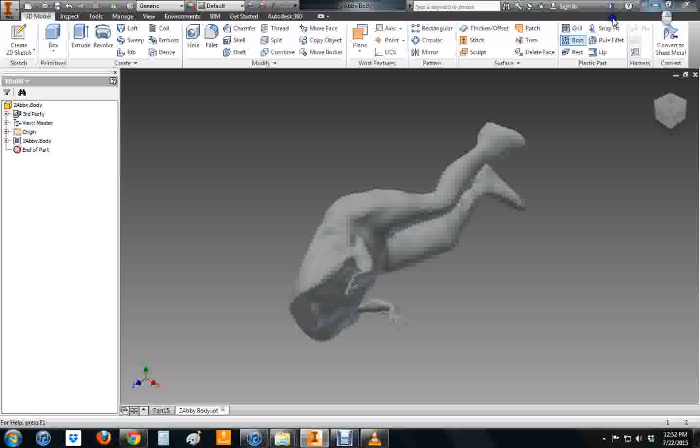So what you're going to do is go to Inventor, go to New, Standard.ipt, go to Classroom Programs, excuse me, not Classroom Programs, go back to your bobblehead. Here's my 2Abby.Body, we're going to bring it in up top here to open that up. Now this may take a moment or two, I'm going to hit pause because it'll be back in a second. Okay, that only took a few seconds, which is good, but what we did was we brought it into Inventor, and now the next thing we have to do is create it.

There's an app called Convert to Base Feature. This is an add-in that you can get off the internet if you go to Autodesk's website, if you don't have it on your computer here at school, which you should. Go to Convert to Base Feature. Now there are two options here. The first one is solid surface, and the other one is composite. It's hard to tell which one is set up, but you want solid surface, so consciously make an effort to click on that. We'll click Delete Original since we don't want that, and we'll say OK.

Now I know this should take a while, so we're going to pause and come back. This will take 5 minutes or so. Okay, so we're back. That took 2 or 3 minutes. It can take a very long time, especially on some of the computers in the room that don't have as good resources as my desktop here. So you sometimes have to be patient. It will say not responding, but it is responding. It's doing something, so eventually it comes back.

Once you've got it as a base feature, it's a pretty resource-intensive file. So just be conscious of the fact that if you do a lot of zooming and moving things around, it really goes a little kablooey. So I would just make an effort to do as little to it as possible. What I need to do is focus up on the top of this neck, and I'm going to zoom in. You see I zoomed out and zoomed back in. It hates that. And now it's paused and it's thinking. See, it says not responding.

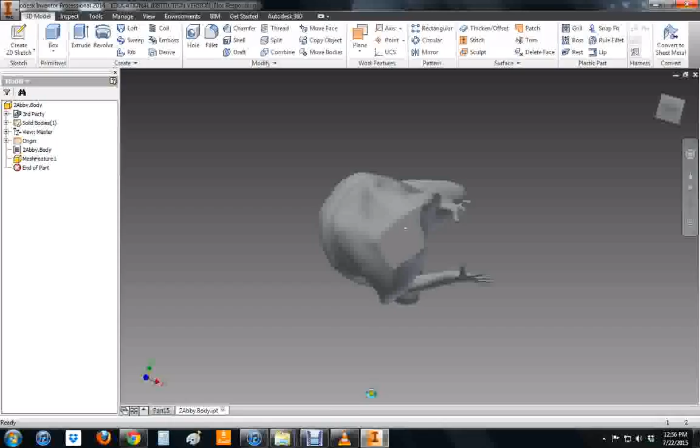That'll come back in a second, but again, I have a bad habit of scrolling the wrong way on my mouse, so I scroll out and then in when I want to zoom. I'm going to hit pause here in a second if this doesn't come back. It will eventually. Okay, it was only another 10 seconds or so, but I did center it and get things exactly how we want them. So the next thing we have to do is create a 2D sketch on top of your neck.

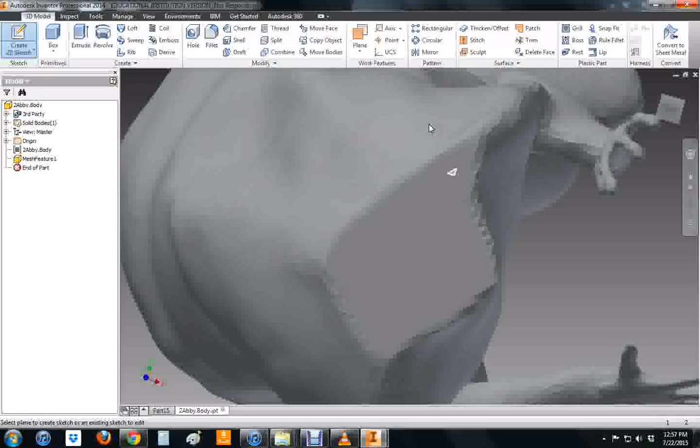Now, a couple things to think of. Let's sew this on and I'll explain better, but you have to choose one of these little triangles, which hopefully are relatively straight up and down. So we're putting our 2D sketch on here. One of the most important things is that your neck points straight up and down. You want that spring to go directly into your body.

So if you're in a pose where you're hunched over or laying on your back or something weird like that, you're going to have to spend quite a bit more time putting this work plane on, because that work plane has to end up being straight up and down. If your flat spot on the top of your neck isn't straight up and down, then the spring isn't going to go straight up, and you're going to have a bobblehead that doesn't really work. So here's our work plane.

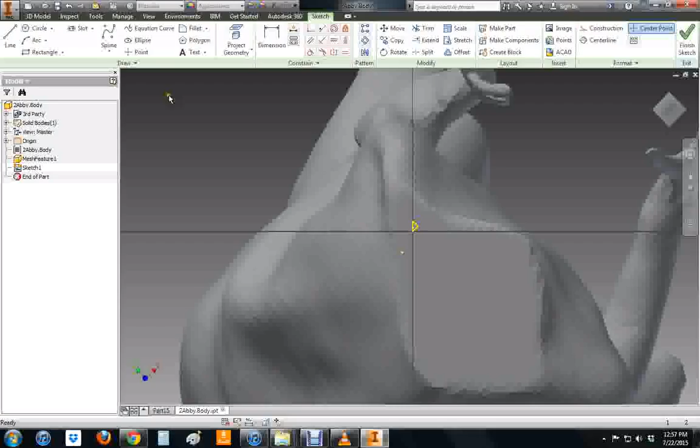Now we need to put a hole on here. The springs are 0.3125, so we need an outer edge of this circle that is going to be more than that. So I'm just going to randomly draw a circle on here. The thicker you can make this wall the better; one of the mistakes we made was a real thin wall. But while 0.5 is too big, you don't want too big a neck. I'm going to go with, let's call it 0.42, and I'm just making up a number.

There could be a better one to use. So it's something you really got to look at after the fact. It's going to be specific to how yours got laid out. So I'm going to say 0.42 should work with the size of our spring. So I'm going to say OK here, and then I'm going to move this around so that I feel like it's relatively centered, on this spot here.

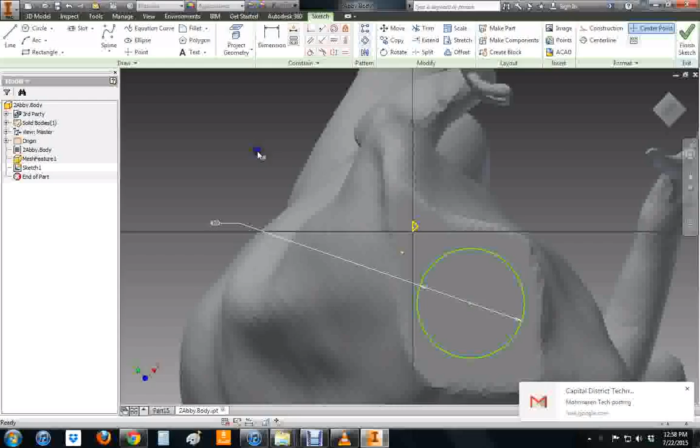I think that's decent. So then I'm going to say Finish 2D Sketch. I'm going to go to Extrude. And again, I'm really trying hard not to zoom in and out, not to change my rotation angles, because it goes a little kablooey when you do. Okay, I'm going to risk it. I'm going to rotate it a little here so you can see. That didn't work, or it's not responding. I don't know which.

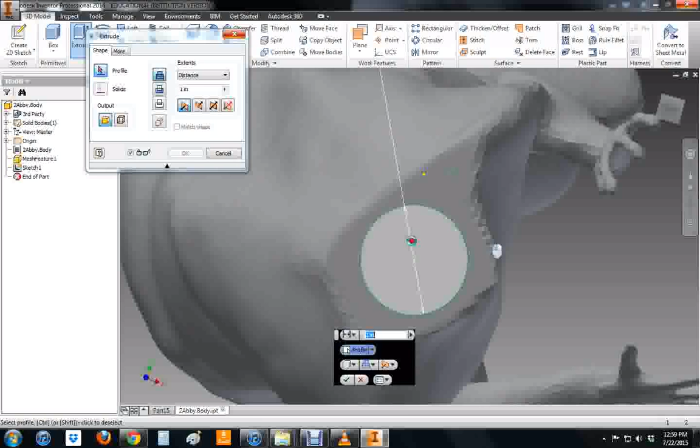Yeah, it's thinking. See what I'm saying? When you change your rotation angle, it has to relook at it all again, and goes away and comes back. So I'm going to pause and come back. Okay, so I'm back, and all I did was change my rotation angle. So I have a circle that's 0.42, and it's going 1 inch off my body, which is definitely not what I want. What I want to do is send part of that into my body and part of it out of the top of my body.

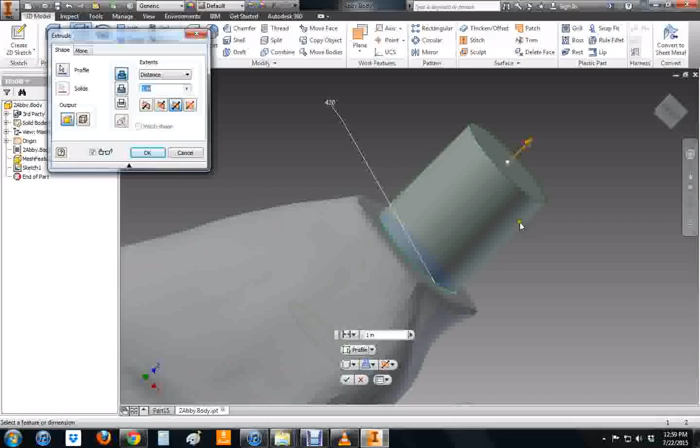And so now it's thinking because it's shoving that object in there. So see how quickly that goes. If it doesn't go quickly, I'll hit pause again. But we want to go about a ½ inch out and about a ½ inch in. I wouldn't suggest much more than a half an inch with your neck. I think that's pretty decent. Could even potentially be a little bit less, but you don't want to get too crazy with it. So we're going to say okay, and we're just extruding that object into your body.

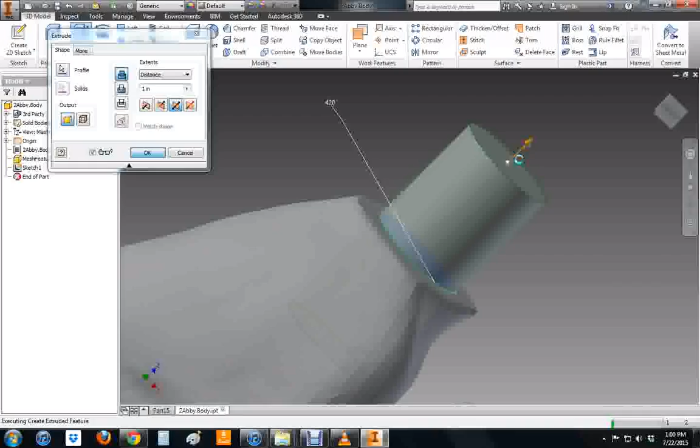And then as soon as this is done thinking, we're going to put another work plane on here. We're going to draw a circle on that work plane that is going to have a dimension that's a little bit bigger than 0.3125. If this takes a long time and I have to pause and come back, I'm going to do some of that without you beforehand. So we're going to look for a circle that's like 0.33, something like that. So it looks like we're good. So let's go create 2D sketch, put it right on top here. I'll hit pause while it recenters it.

Okay, so it's done. It's reoriented here, and I drew a circle on, right, using that same center point. I'm going to go and I'm going to dimension it. And again, I was mentioning that the spring was 0.3125, so we need to be a little bit bigger than that. So I'm going to go 0.33. We don't want to be much bigger than that. We want the spring to just exactly fit, but we want to make sure we leave enough wall here. That's one of the mistakes we've made. We've had really thin walls, and either they didn't 3D print well, or they cracked, so you got to leave a little bit more than maybe we have in the past. So that's good. Finish 2D sketch.

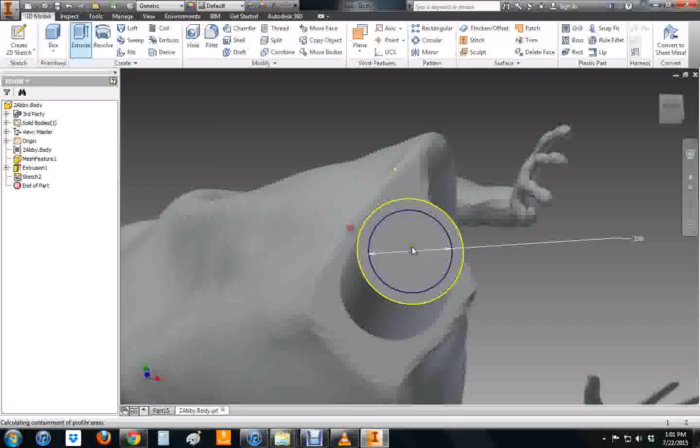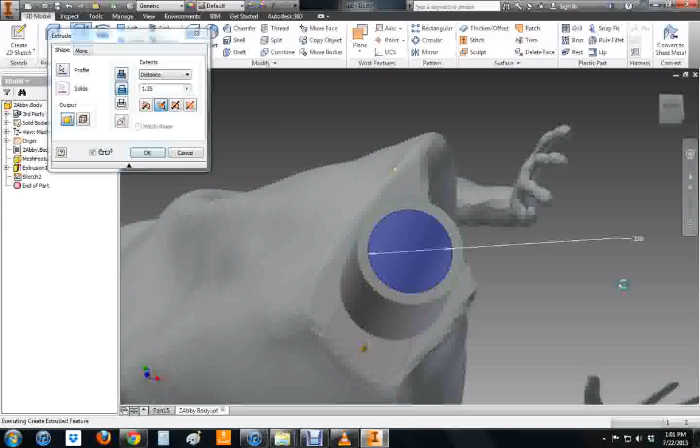We're going to extrude. Click here, and again, it'll do some thinking. We want to change to cut, so that should change its direction. Right now it's set for 1 inch, so that's going to put us down exactly to the bottom of our circle. I'm going to go a little bit further, just because you really want to make sure you get it in. So let's go like 1.25. So say OK there. And it's thinking again. It's going to make this cut. Looks like it made it.

And then the last thing we need to do is we need to go to Save As, and we're going to save this as an IPT. Because the idea is going to be that when we assemble them, we put them all together in the same way. So again, this is going to do a lot of thinking. I'm going to make you watch this, but I'm going to go to File. I'm going to go to Save As. Oh, maybe this is going to let me do it. Go to Save Copy As.

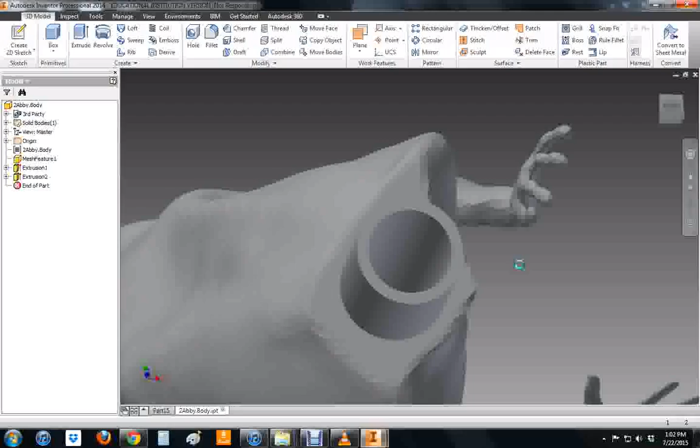Check that. And I'm going to name this 3 Abby Body, since this is sort of the third version, even though it's kind of our first IPT. But click Save. Yeah, we'll say Continue, and we're good. I'm going to do the same thing to my body, and then when you see the next video, we'll start talking about assembling our scenes, and we'll do that for both objects. So if you have any questions, come on up and ask.